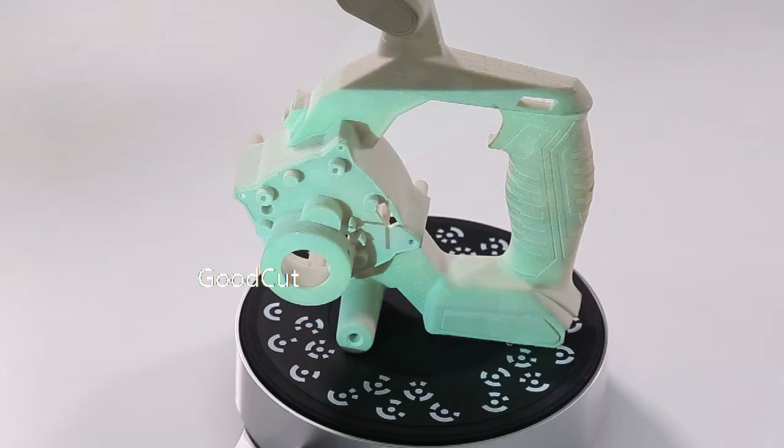We take turntable align mode as an example this time to introduce the scanning process and the software operation, and then click the Start Scan button to start the scan. The turntable starts to rotate and the scanner projects the raster. The scan data will also be displayed on the software interface in real time. After the object rotates for a circle, the first scan results will be displayed on the software interface.

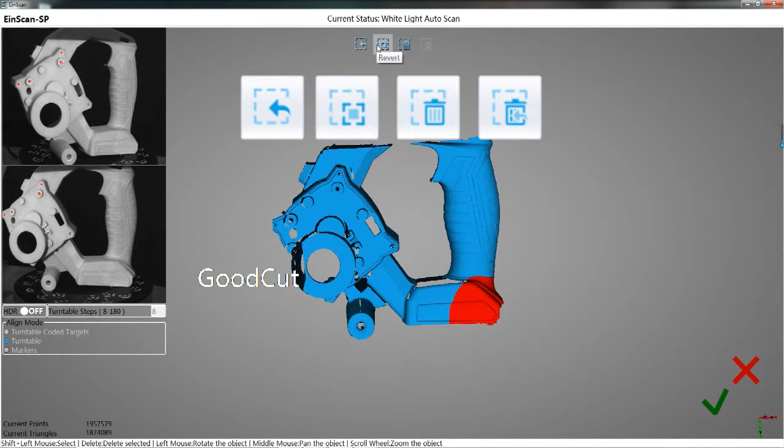Hold down the Shift key. Meanwhile, select with the mouse. Then you can edit the chosen data with the buttons at the top of the software. Click on the tick to complete the current scan. If the data is not complete, you can change the object to other directions. Click the Start Scan button to continue scan.

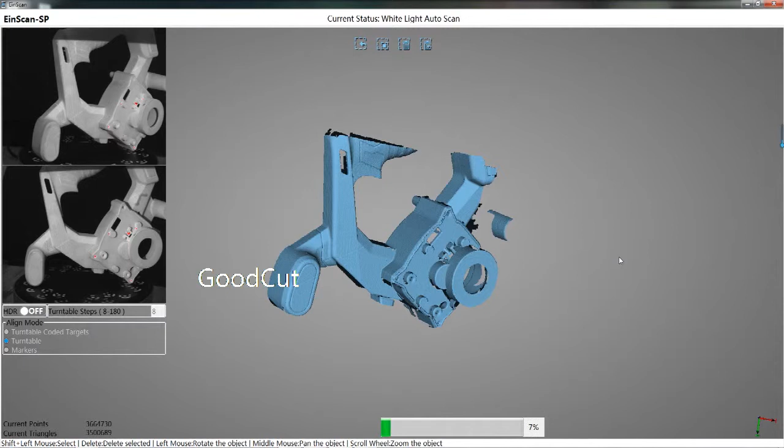Click on the tick, and the software will automatically align the two data. If there is an align error, you can select the Manual Align button. Then hold down the Shift key to select 3 common points of the two data. The software will perform the alignment as selected.

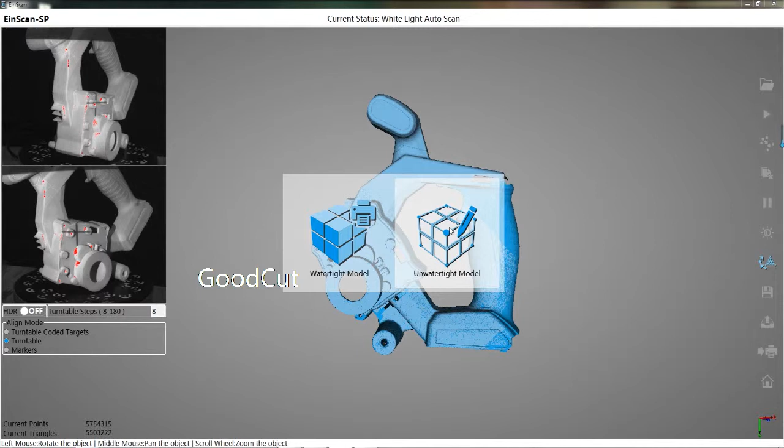Select the Mesh button. Choose the mesh mode as needed. The first mode is to generate a watertight model. That means the software will automatically close the data. The second is the unwatertight model. That is, the software will not completely close all missing data.

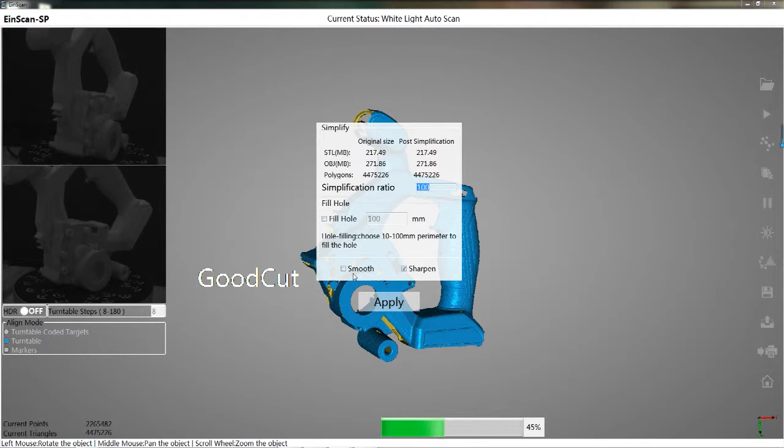During the calculation of mesh, a simplify window will pop up. The simplification ratio means simplifying the data size according to such ratio. Choose Fill Hole option. The hole will be filled according to the prompt. Decide whether to tick the smooth and sharpen settings as needed. For more information, please refer to the user manual.

Click the Save button. Select the desired data format to save. Scale the data as required.

The fixed scan mode is suitable for large-sized objects, or objects which have been scanned in turntable mode but we did not get complete data. You can import the project file into this mode for a supplementary scan. It can align the data by marker points and features.

Select the fixed scan mode. Adjust the distance according to the clarity of the cross. The clearest cross position is the best position. Select the appropriate brightness and click the Start Scan button to start scanning. If no edit is needed after the current scan is completed, click on the tick.

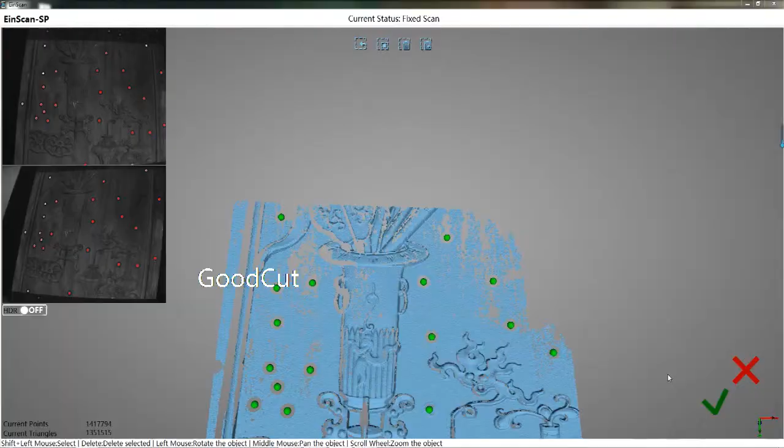Change the object to other direction to continue scan. At least 1/3 of the common area shall be guaranteed for 2 scans. The software will automatically align the two data. If the automatic align fails, the manual align can be conducted. About the manual align process, please refer to the auto scan mode. After several scans, we can get the